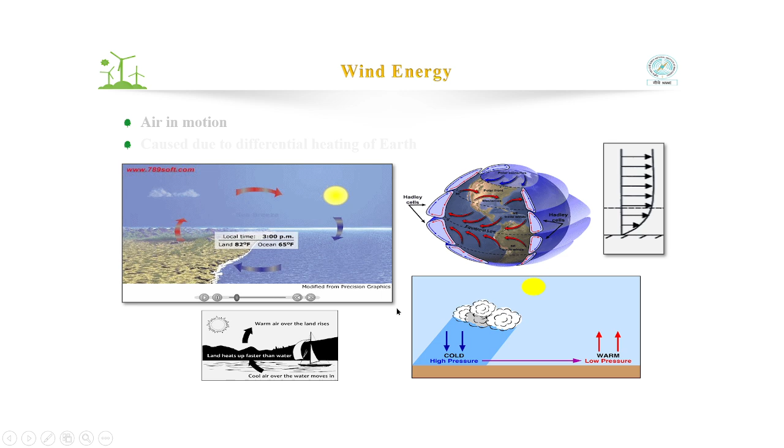So, in essence, against 100 gigawatt target, 60 gigawatt of wind, achievement at 2022 is 40. Now it's about 50 gigawatt now. In April 2024, it is almost close to 50 gigawatt, which you can ascertain from your MNRE website. This is again just to show you how the wind changes.

Now, how is wind energy converted? If you feel confident in certain areas, let me go faster. Wind energy conversion is kinetic energy in the wind.

What is kinetic energy? Half mv square - mass into v square, v being the wind velocity. That is the kinetic energy in the wind. And in 1 second, if so much wind mass is moving, that mass into inertia will give you the total thrust on the wind turbine.

So we try to get the kinetic energy in the wind through a rotating element, that is a wind blade - the prime mover. The rotor and the hub together are called the prime mover. Using a rotating element, you try to capture the energy.

That means, mechanically, you are rotating a blade which is fixed to an axis - that means you are getting into mechanical energy. You are converting kinetic energy of wind to mechanical energy. Is it clear?

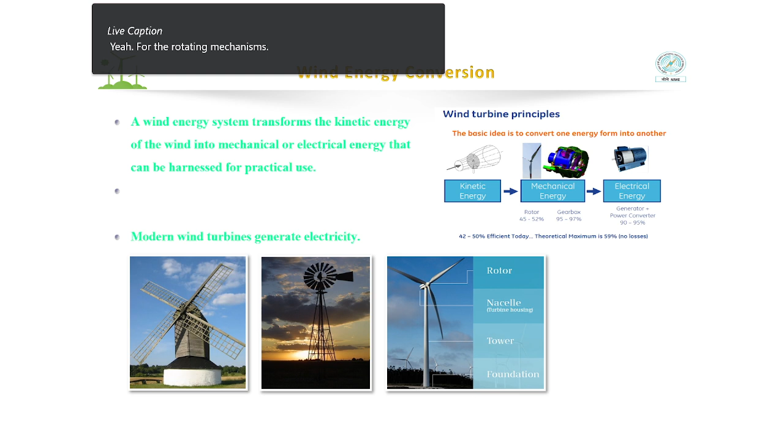We are using the wind to rotate the wind rotor. Why do you need a gearbox? For the rotating mechanism, sir. Yes, the rotor will rotate at a very small RPM - revolutions per minute. Say 10 to 20 revolutions per minute maximum. And the modern very large wind turbines will even go 5 to 15 revolutions per minute.

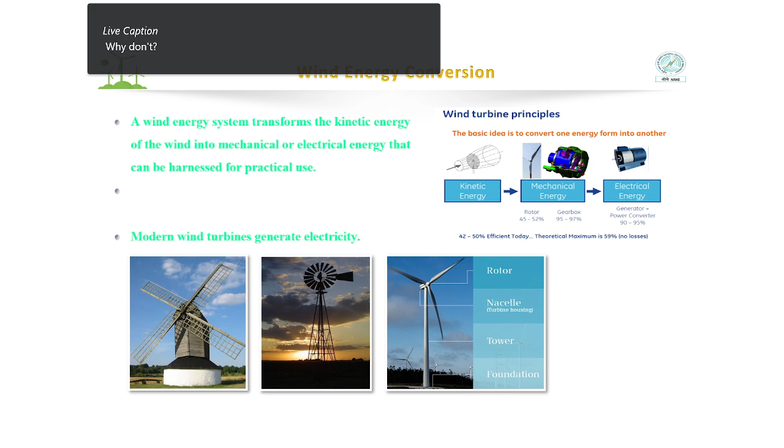So when you come to the generator, if you want to convert to 50 cycles per second, what is the requirement? 50 into 60 is 3000 - 3000 revolutions per minute is required at the generator end. So to convert 20 RPM or 10 RPM to 3000 RPM, you need a gearbox.

And of course, this requirement of 3000 RPM can be reduced by properly designing the generator with multi-pole configuration.

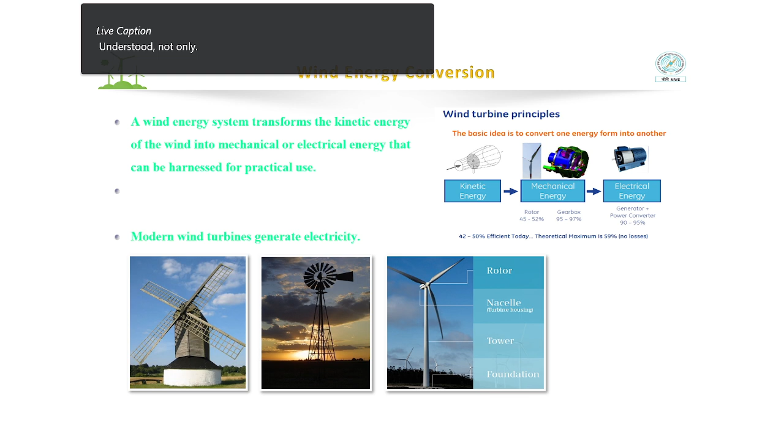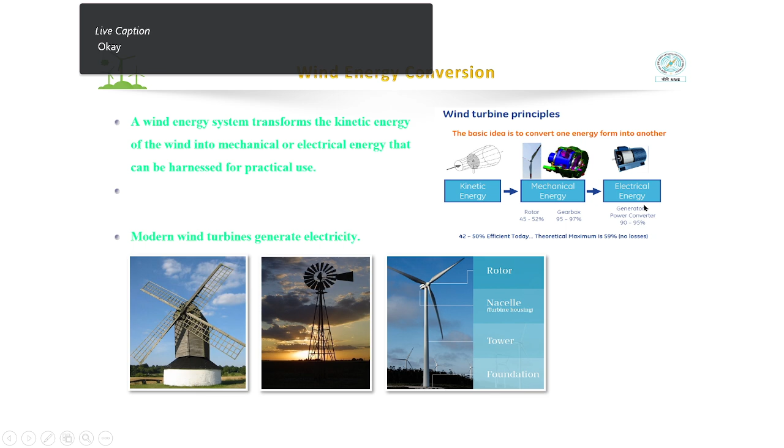If the simple generator has multiple pole definitions, more generator poles means a lower required RPM. If the generator has four poles, the required RPM will be 1500. If it has eight poles, the required RPM will become 750. With multiple poles, the required RPM level can be reduced.

So you need a mechanical energy to electrical energy conversion system. Sometimes this conversion system is gearless, meaning the rotor and generator will be back to back. In that case, they manage pumping into the grid using power electronics.

If gearbox definition means it converts - what is the definition we say for gearbox, sir? The gearbox will have two sides. One side will be a low speed shaft, the other side will be a high speed shaft which will be interfacing to the generator. So the low speed of the rotor will be converted to high speed, the requirement of the generator. That is the purpose of the gearbox.

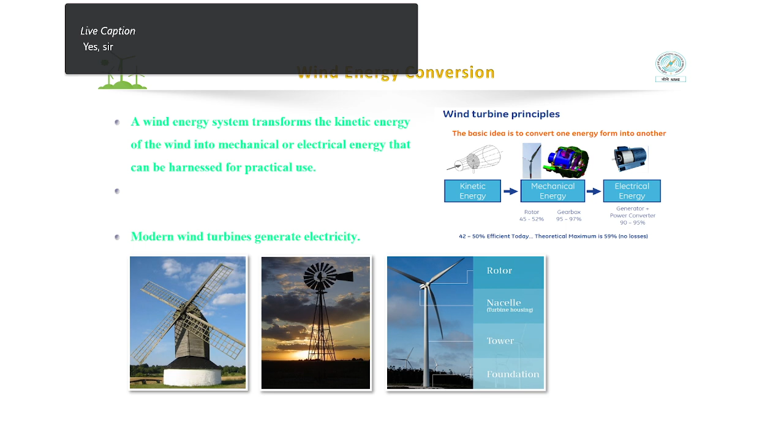That is, you are stepping up - just like a step up electrical transformer. Similarly, for stepping up mechanical energy, you need a gearbox. Okay, you got it? Got it, sir.

And then you have this generator. It needs to give 220 volts, 50 hertz constant, to interface with the grid. But the wind is continuously varying, so the wind power will be alternating current with variable frequency. No, the frequency will keep on varying as the wind fluctuates, as the rotor speed changes.

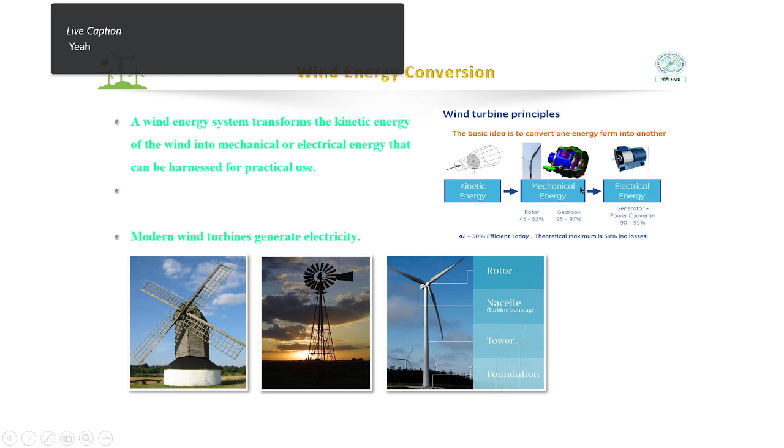There can be constant rotor as well as variable speed rotor. Modern wind turbines are with variable speed rotors, so frequency with respect to mechanical energy will be varying. I said frequency with respect to the electrical system - at the grid end it will be constant. But what is received as mechanical energy may be having variable amplitude and variable frequency.

So what you have to do is take the AC current generated by the wind energy - the variable amplitude, variable frequency - and go through the power electronics box: AC to DC convert, and from DC, like our UPS inverter, you convert it back to constant frequency, constant amplitude current. So the magic is done by the power electronics in the case of wind turbines with variable speed operation. Then only you can get more energy captured from the wind.

We will go further, you will know more clearly. Okay, okay.

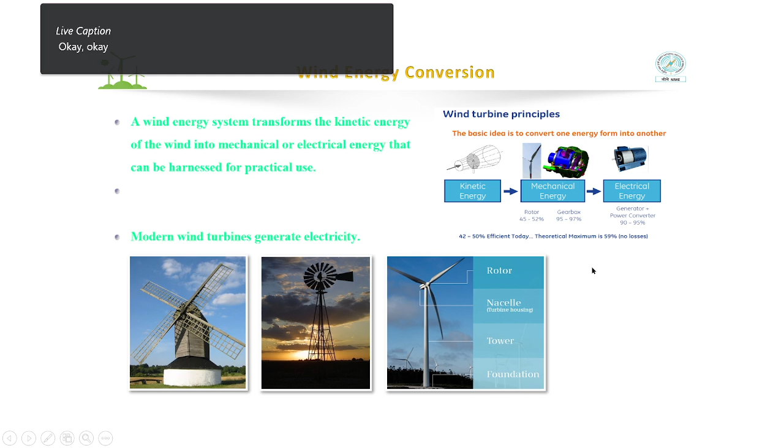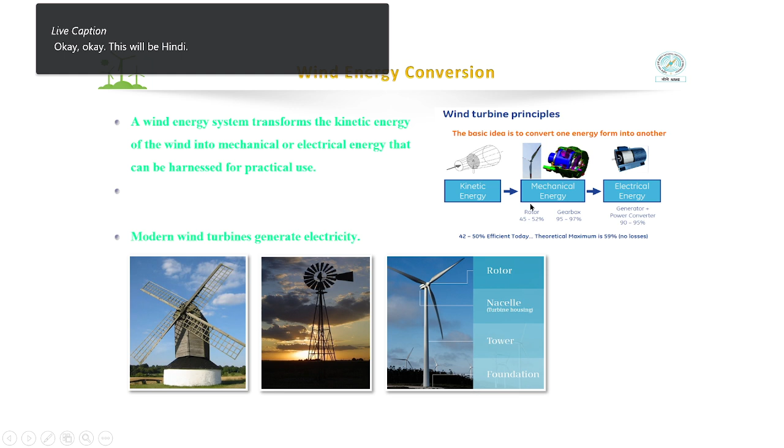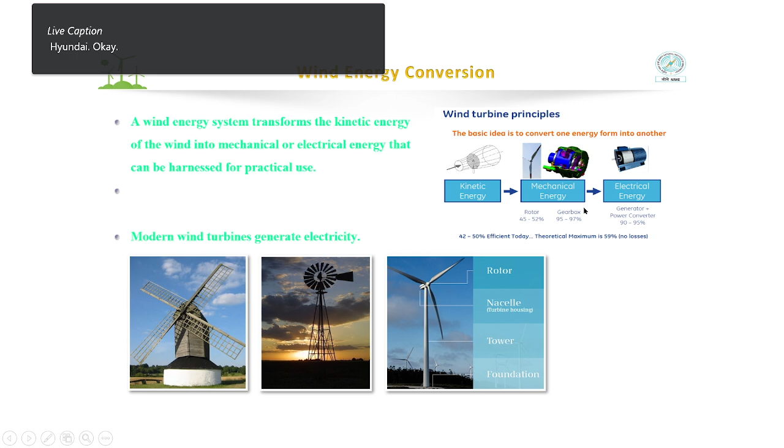So the rotor, this power electronics will be interfacing along with the gearbox control and the rotor blade control. Everything will come in the power electronics. There will be sensors from the rotor blade, sensors from the nacelle anemometer for wind velocity, sensor input from the gear - the low speed RPM of the low speed shaft and the high speed shaft. All the inputs will be going into the power electronics.

And then it will convert AC to DC and from DC to AC in the required frequency and constant amplitude, 220 volts, 50 hertz, for interfacing to the grid. That magic is done by the power electronics.

Let me go to the other point. So, how do you get power in the wind? What is the power in the wind? We said kinetic energy is half mv square. M is the mass of the wind that is flowing through the rotor, v square is the incoming free stream wind velocity in meter per second, and A is the swept area of the rotor, the circle diameter - it is pi r square or pi d square by 4.

A here is the swept area of the rotor. Do you get it? Yeah.

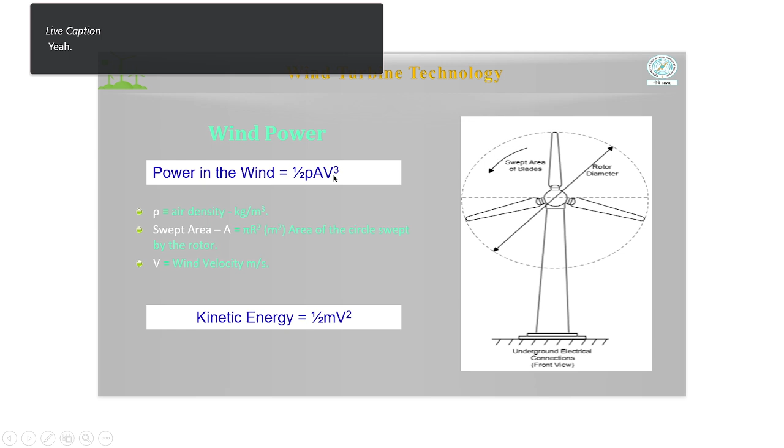And half rho A v cube. V is the instant wind velocity, v cube is the power in the wind. Just remember, this is only power in the wind, it does not show the efficiency.

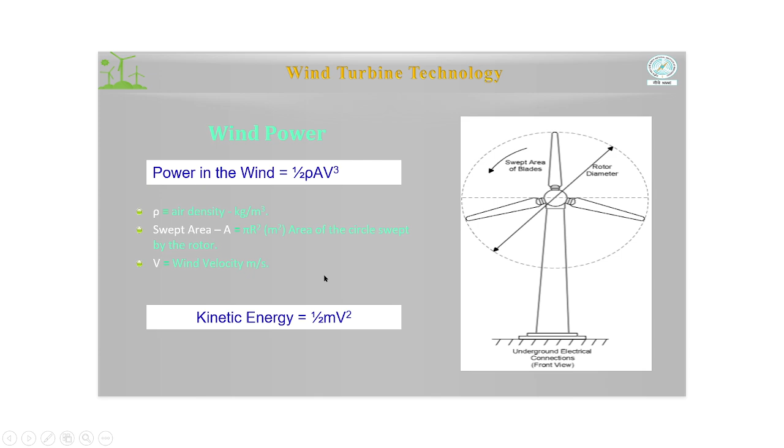If we have the incident wind speed at V, and this is the wind turbine, the plane of rotation of the wind turbine. Is it clear? Yes sir.

The wind is approaching the wind turbine normally, perpendicular to the plane of rotation. This is enabled by a mechanism called yawing. By sensing the direction of the wind, the yawing mechanism will turn the wind turbine blade and the rotor to the wind direction automatically. That's called the yawing mechanism.

Spelling, sir? Y-A-W-I-N-G. I'll be discussing yawing in future, in the subsequent slides. Don't worry, I'll transfer the slides also to you.

By yawing, the rotor will align itself normal to the wind direction, automatically.

Let me just change to another PowerPoint where you will find it more clear. Are you seeing this, wind energy perspectives and prospects? Yes sir, okay.

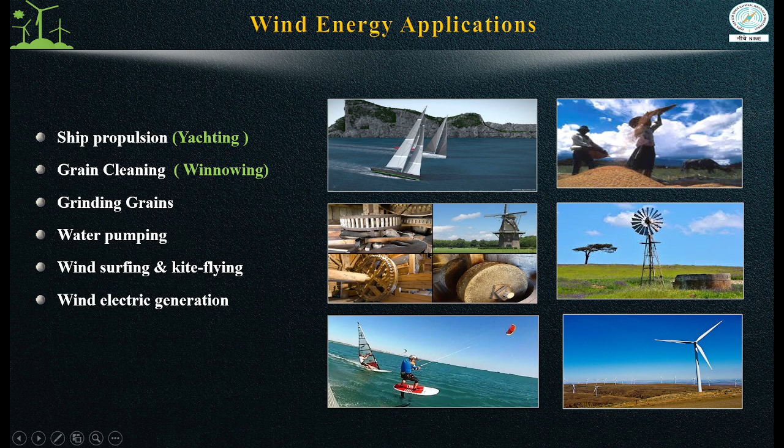The wind energy early applications are yachting, grain winnowing, grain cleaning, and water pumping, and rice mills in Holland. All those things were early applications.

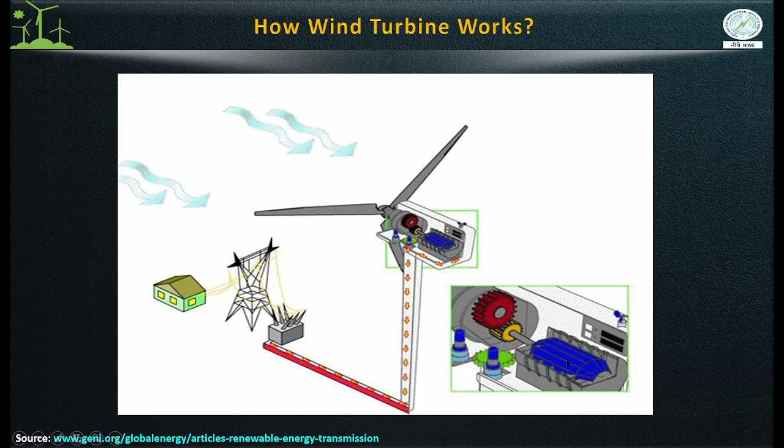One minute, let me. This is how it rotates, the wind turbine, how it works. The wind comes, it rotates. There is a low speed shaft here, after the gearbox there is a generator high speed shaft. As the generator runs, it gets the output. But here, the wind turbine works like this.

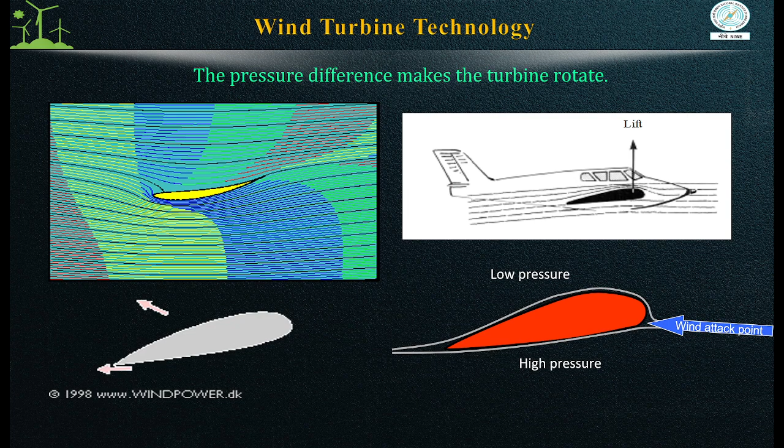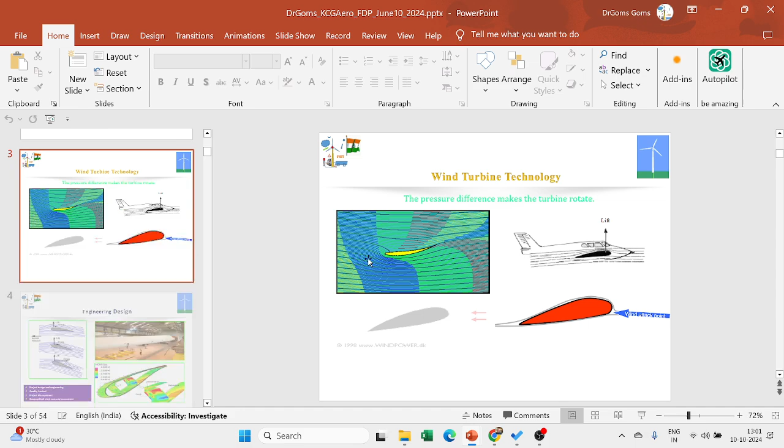Are you seeing wind through a stream tube? Yes sir, this is from a book actually, it's a very old book, Joshua Earnest, Tore Wizelius, 2015 it was released. So as I told you, the wind velocity is coming here. This is a rotor.

If you have to maintain mass, moment of inertia, and momentum, then you will get two equations. This is power before and power after, and this is power captured. So this is the equation.

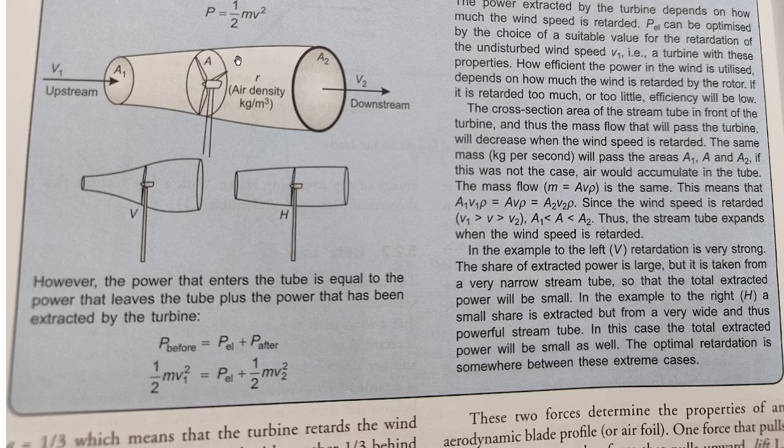In the downstream side, V2 will be lower, isn't it? Yes sir, because V2 cannot be zero, there will be air coming from here, air coming from here, so it will never become zero. So there will be some relative velocity left, and the difference in velocity will be half mv square.

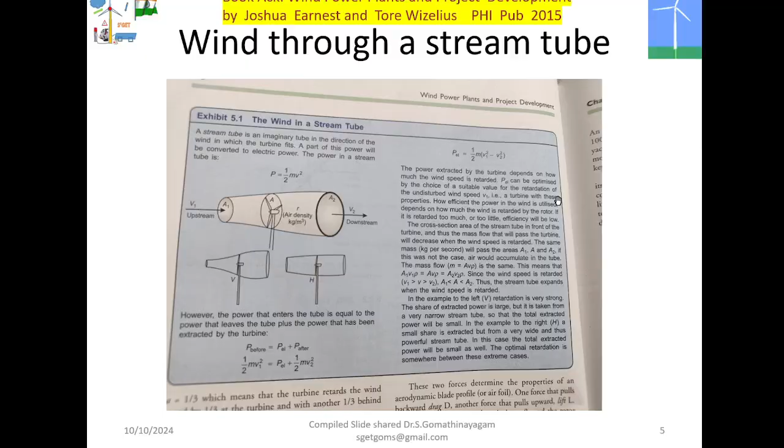And next slide, if you go, that will be captured by a tip velocity. There will be a limit of the efficiency, the power coefficient. So 59% is the theoretical limit in an open atmosphere. A rotor can capture only theoretically 59% of the energy in the wind.

It is depending on the blade tip speed ratio. Tip speed ratio is nothing but, if n is the revolution, rotor speed in revolutions per minute, RPM, then n by 60 is cycles per second. Agreed? Yes sir. Into 2 pi will give you omega. Cycles per... 2 pi f is equal to omega, you remember?

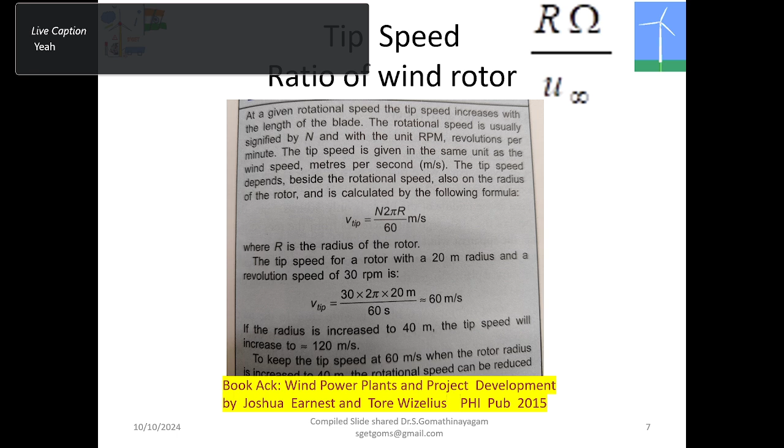2 pi f, f is frequency, so cycles per second is nothing but frequency. N by 60 is frequency. 2 pi into frequency f is called omega, angular velocity. Angular velocity of the rotor into the radius of the blade will give you the tip speed, how the tip speed will move. Is it clear? Yes sir.

So based on the tip speed and the incident wind speed, you can define this equation.

This equation is called TSR, tip speed ratio. That is tip speed divided by the mean wind speed, the incident wind speed V bar. That tip speed ratio and the power coefficient have a relation - how much power can be extracted by any rotor.

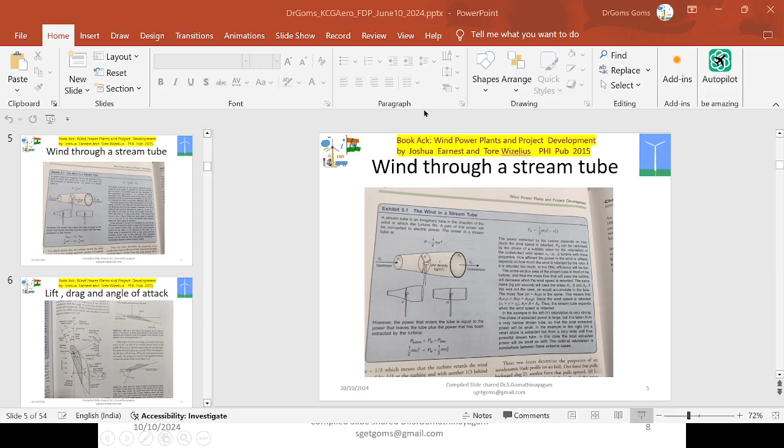However aerodynamically well designed a rotor is, how much power can be extracted? Theoretically, only 59%. That is why the practical achieved results are somewhere around 45, to 50%, 40 to 50% maximum.

The funnel-like thing you see behind the wind turbine - obviously, the mass flow in this circular area is V1 into the area here, and that circle, after going through the rotor like a venturi tube, will become bigger. V2A2 must be equal to V1A1, otherwise there would be a vacuum in between, isn't it? Yes sir - there should be continuity of mass as well as continuity of momentum.

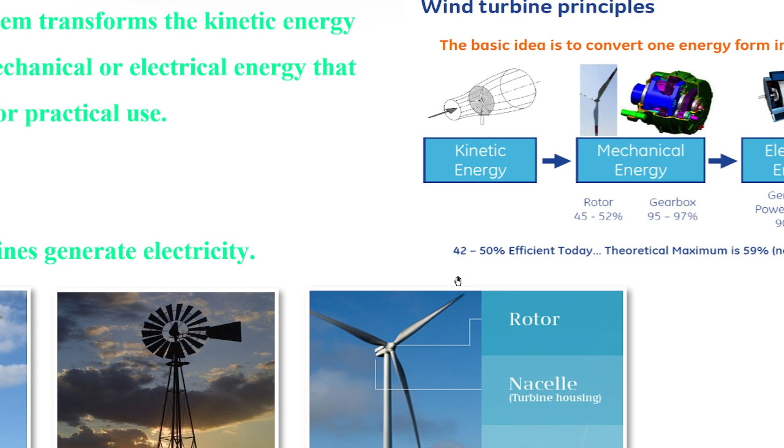Mass into velocity is momentum. Momentum should also be continuous, mass also should be continuous. So small A1V1 must be equal to A2V2. That is why, because this area is big, V2 will be small. So that much energy must be left out, which will definitely not be captured by the rotor. So maximum efficiency is only possible up to what - 59% theoretically. Maximum achieved is 42 to 50%.

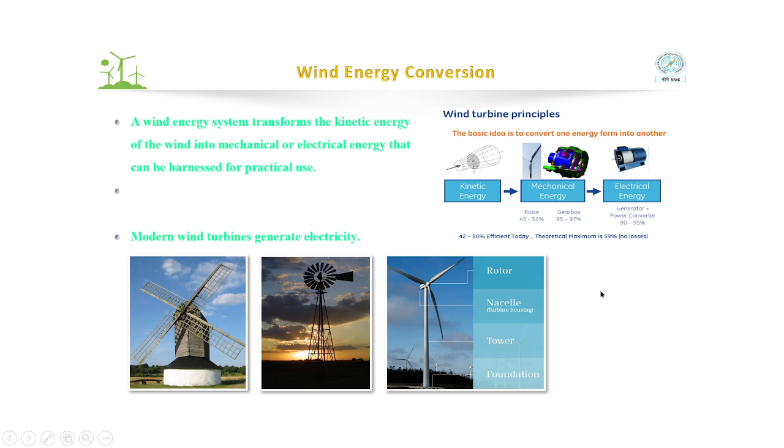But gearbox efficiency can be designed by design - with lubricants and all that, you can go to 95 to 97%. With power electronics, you can have generator electricity efficiency also at 95%, even more in modern days.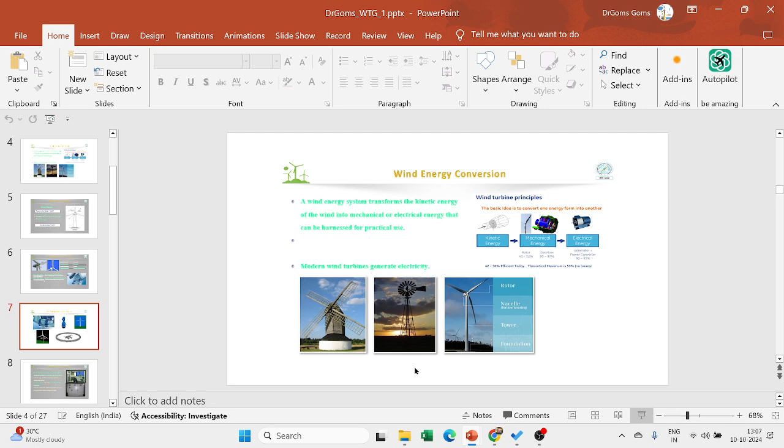What are the other controls we are building in to optimize the wind? Before this, shall we quickly see the aerodynamics of wind? I'll just cover aerodynamics of wind - KCG will give that.

This is a recent presentation made in KCG College of Technology, in one of the faculty development programs. So hope you understand what an aerofoil is.

An aerofoil is not like a fan - it is a blade cross section, the cross section of the blade, and the shape is what matters, which makes it an aerofoil. Aerofoil has got a leading edge, which is a rounded edge, and a trailing edge, which is a sharp edge. This horizontal distance is the chord.

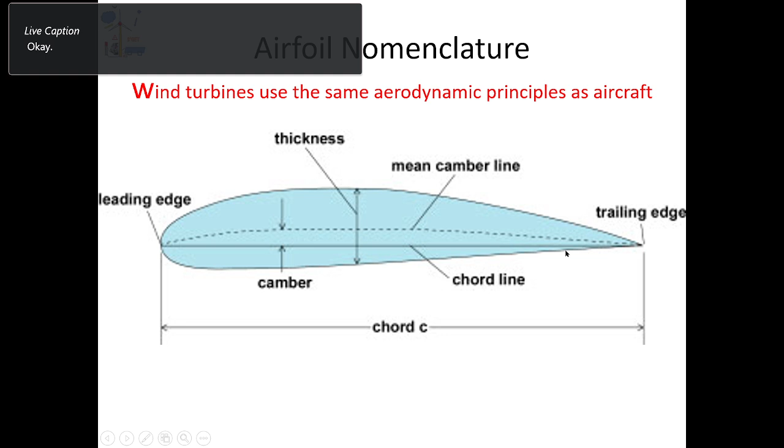Don't worry about capturing all this in your mind. An aerofoil is one in which if you allow wind to pass through, it will not separate from the surface anywhere - it will smoothly go through like a fish.

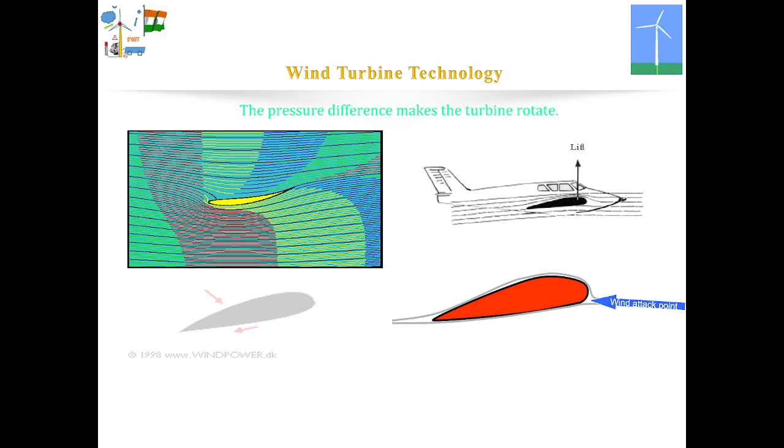Can you imagine like a fish how it is swimming into the water without any splash? Similarly, the aerofoil section will allow air to pass through without separating from the surface, smoothly like this, with no separation. By this, you would have seen on the wing of the aircraft during takeoff, it will completely be closed, and they will raise the engine so fast and get the best of the lift. You have to optimize lift.

Let me go to this. This aerofoil shape is like this - when the aerofoil is facing a wind, or when the aerofoil is moving in the air, like the aircraft wing, both ways are okay. You imagine both ways - either the wind turbine blade is facing the wind, or the aircraft wing is moving in air.

So you develop one force perpendicular to the aerofoil, that is called lift. One force in the line of the wind direction, that's called drag - it is a loss. So you have to maximize lift and minimize drag. Then only you will be able to get the torque.

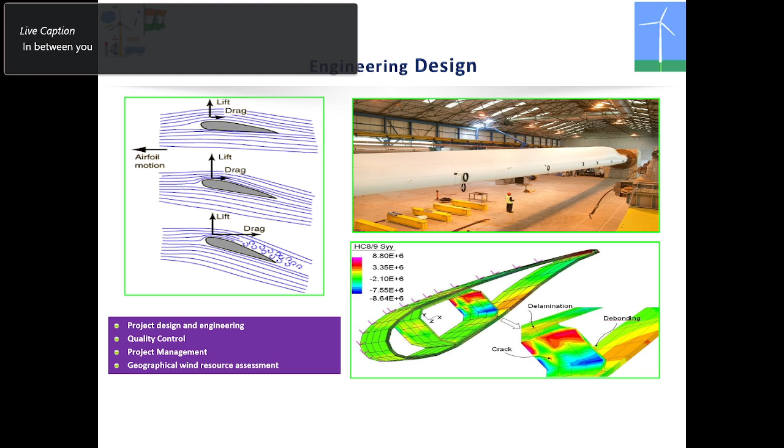You said, when the wind is optimized, the lift which is in the direction perpendicular to the direction of the wind - if the wind direction is like this, lift is perpendicular to the direction of the wind. That means if there is a load applied here, the blade will rotate. If a load is applied in the direction of wind, the blade will bend. Is it clear?

So you have to optimize the lift so that you are able to get maximum torque. The lift into the radius will give you the torque. Torque means torsion in the shaft, that means it will rotate.

From all the blades, at every point, if the load is in this direction, perpendicular to the wind, then it will also rotate. The load here also will rotate maximum. So you can imagine a load at the tip will give more torque than a load at this point. Is it clear? Because the distance is small.

So most of the wind energy is captured by one third of the wind turbine blade effectively, because that is having the maximum lever arm. The purpose of engineering design is to optimize the lift and reduce the drag.

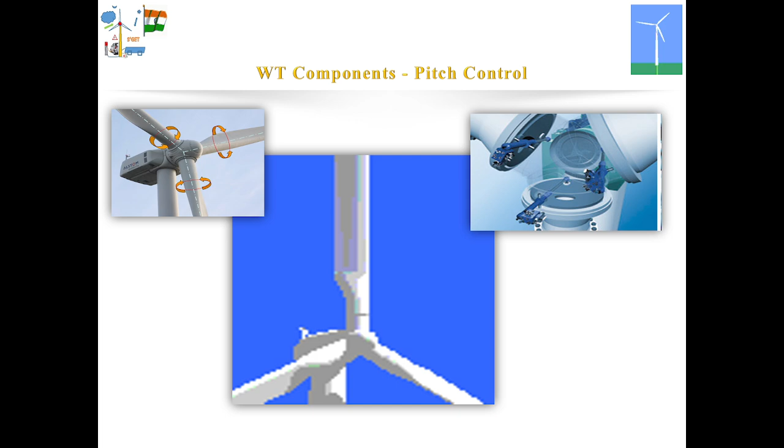This is one of the controls. The next control is blade efficiency improvement through full-span pitch control, where the entire blade is rotated, or partial-span pitch control and boundary layer control. These are all modern techniques.

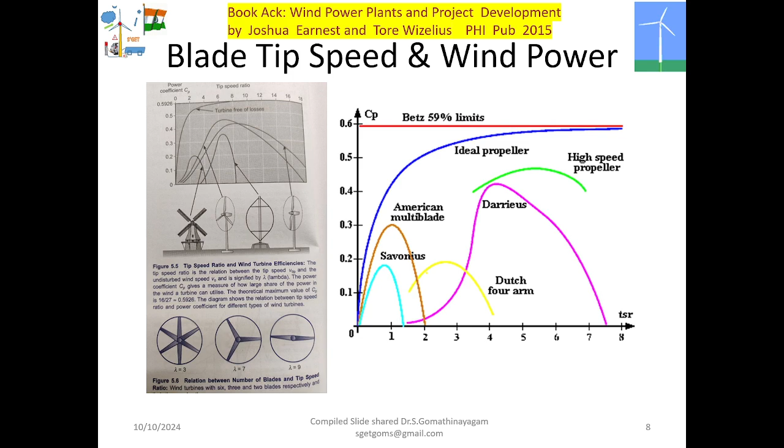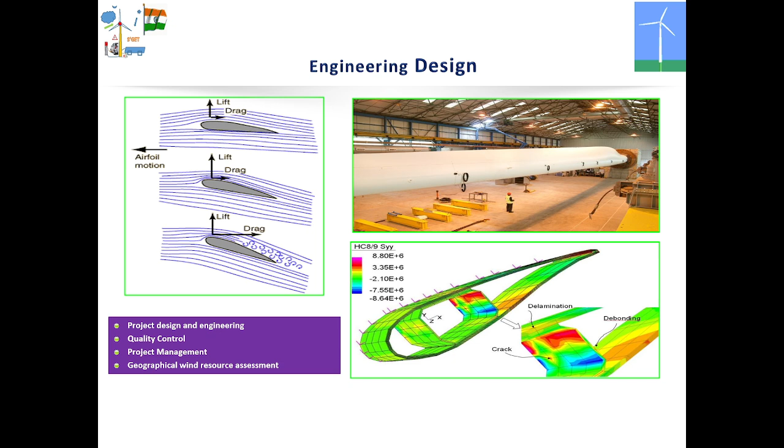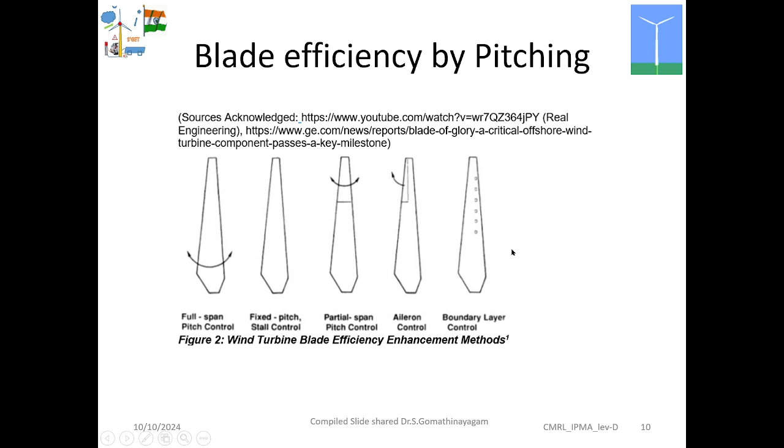By keeping some holes to avoid friction induced by thrust, turbulence over the wind turbine blade introduces heat and thrust, causing a lot of energy loss. To avoid that, similar to how aircraft wings open part of their plates while landing to reduce friction, modern wind turbines have bleeding holes to avoid excessive friction - this is boundary layer control. All these methods improve blade pitching efficiency to get more power.

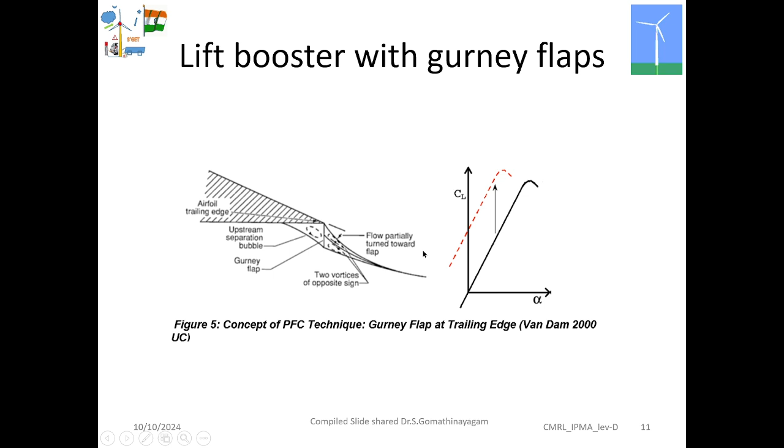There are several lift boosters, and the lift coefficient can be increased. Several methods exist to boost the lift of aerodynamically designed blades. Do you want details on all this?

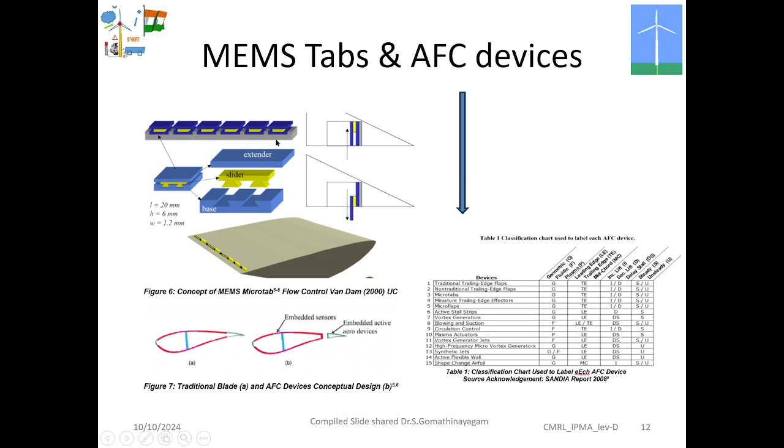No sir, just give an idea. There are a lot of methods now - memory alloys, semiconductor alloys are there which allow a very intelligent way of shifting.

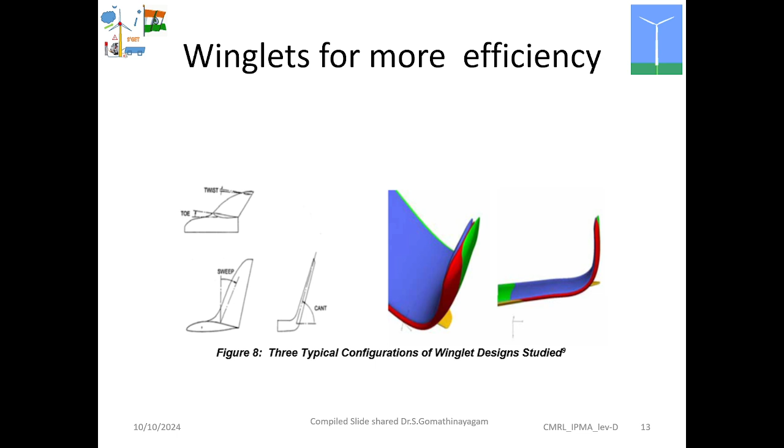You would have seen in some aircraft a bend at the wingtip - it is called a winglet, used to reduce tip losses. Similar innovative things are possible for wind turbine blades, and a lot of innovative efforts are being pumped in now.

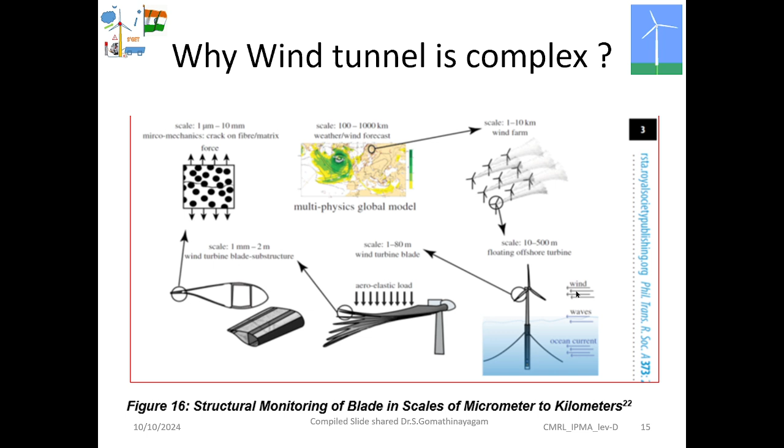The wind tunnel cannot be used for all these studies because this is not the way.

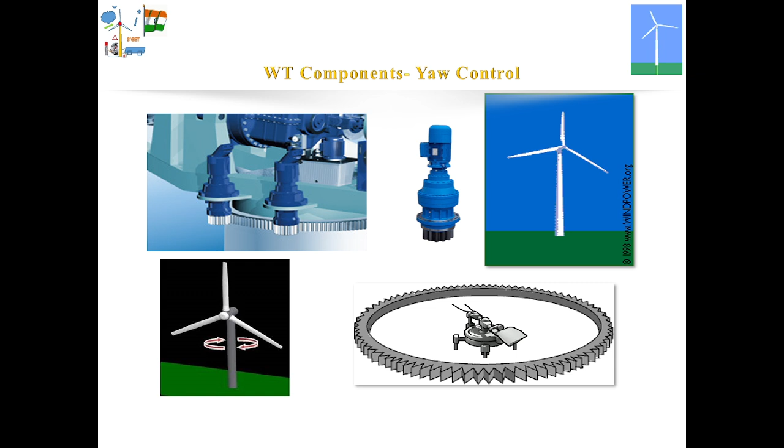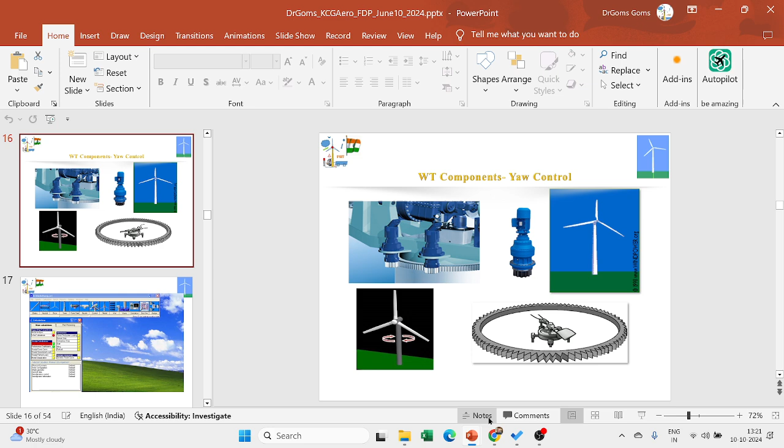Then we will go back to yawing. Well, if you have time, we will come back to that.

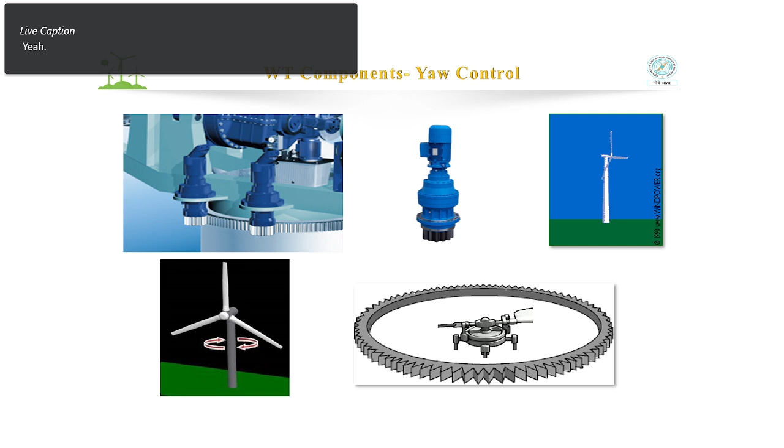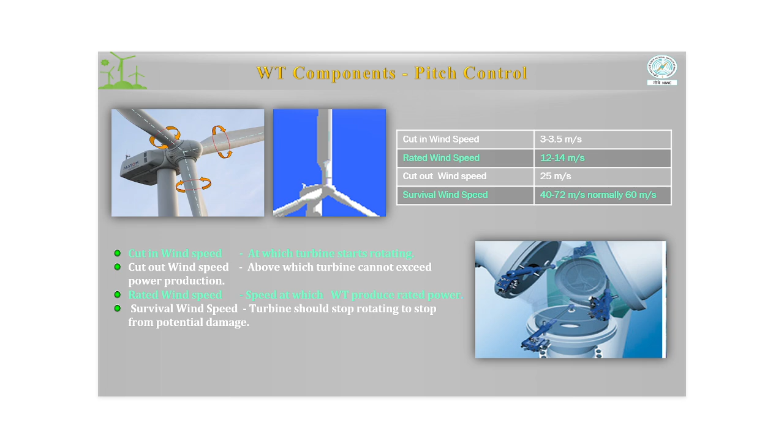So one is pitching, another is to keep the full area circle - the wind turbine should face the wind. Otherwise, if the wind is inclined, the turbine will see an ellipse whose area will be less. For that reason, there is a yaw motor and yaw system in wind turbines, which allows the turbine to rotate to any direction depending on wind direction, so it faces the wind normally and maximum swept area is available, because swept area is in the power formula.

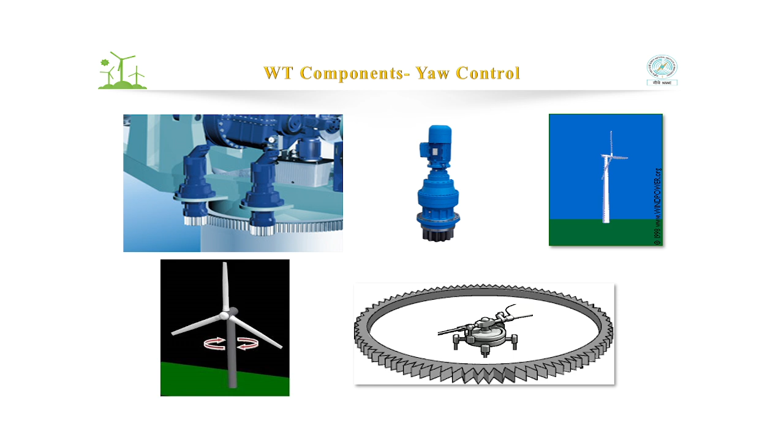We try to keep the yaw error minimum during wind turbine testing. It should quickly align to the direction when wind direction changes - how quickly it goes is called yaw error. This is found during wind turbine prototype testing, and yaw error is also recorded in the SCADA system, as it should be minimum so the wind turbine is more efficient.